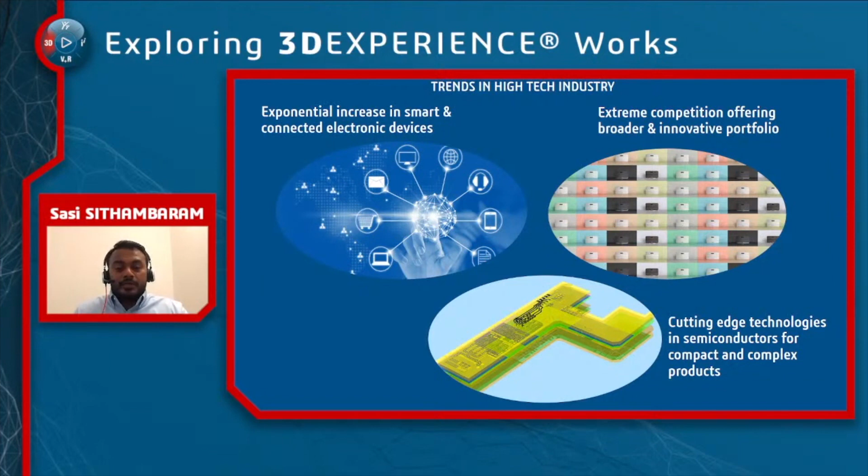Definitely. I mean, consumer products are really far behind right now. I know at least my friend, he ordered this new truck, and it has all the bells and whistles. So it requires a lot of these semiconductors for all the electronics to work, and they're over a year out, just in the supply chain of these semiconductors alone. So I mean, it definitely is a big industry trend right now. I have to agree with you there.

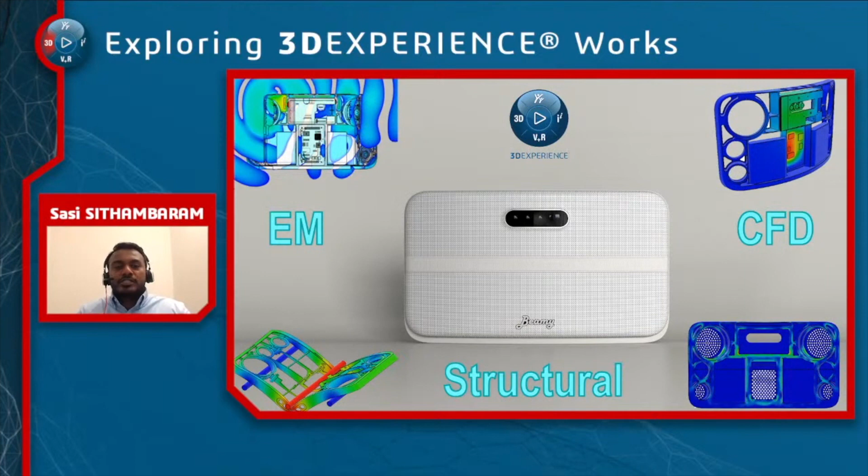So having to run the analysis and make design changes based on the analysis, how do you work in that collaborative environment is essentially going to be our conversation today. And the best part is that with the 3D Experience platform, you can actually run all of this analysis using the same data set on the same platform, right? So we can ensure that everybody is on the same data set at all times, whether it's revision changes or any design changes, they can rerun the same analysis over and over again, and all the different teams would be on the same page.

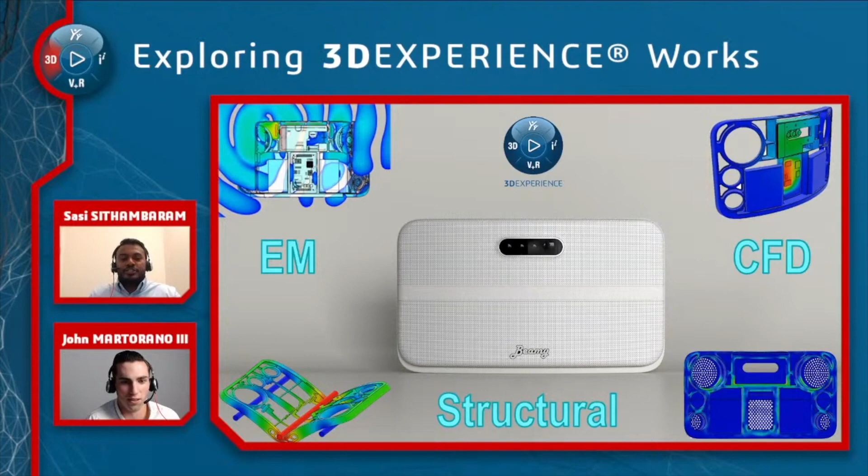So I'm going to actually start off the presentation with the CFD analysis. Now, why do you think that is, John? Well, that's a good question, but I could guess that maybe we don't want it to be too hot, right? Maybe it wouldn't work. That's a problem. And the EM stuff as well, right?

So let's take a look at our CFD solution on the platform. What we have is our fluid dynamics engineer role. All our products on the platform are called roles, because we believe that the product should meet your role, and we integrate all the features and tools to meet your requirement within that role, right? So the fluid dynamics engineer role offers a CAD and PLM embedded CFD for flow and thermal performance simulations. And this accelerates product innovation in a collaborative cloud environment.

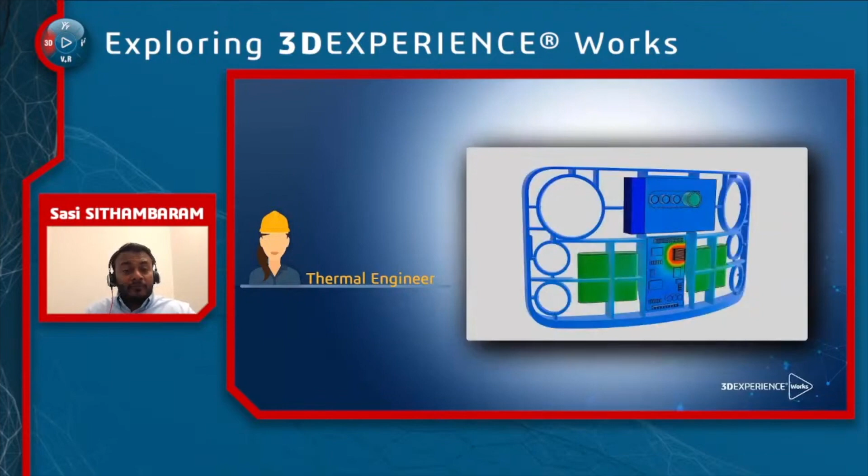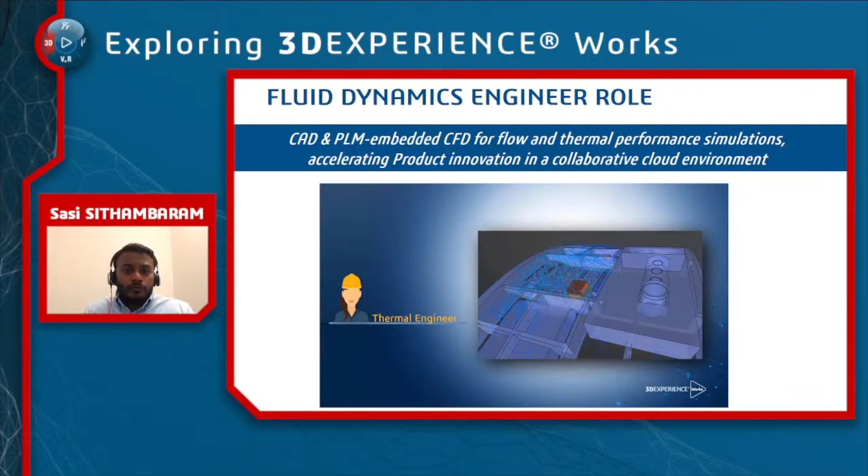And specifically for the Beamy, a thermal engineer would want to check for component temperature, right? So specifically the PCB board, the chips, the heat sink, and then also the airflow. We want to ensure that we have good airflow flowing into the model and then out of the model as well to keep that at a steady state temperature. Now, the fluid dynamics engineer role itself does so much more than just component or airflow type of analysis.

From a thermal perspective, we cover all different heat transfer - conduction, convection, and radiation, surface to surface and solar radiation. In terms of modeling, we do multiple reference frames, MRF.

We model fans, baffles, porous media. So if you think about it, with the fans, baffles, and porous media, the electronic component models become a really good fit for this role. In addition to that, we also have joule heating with this solution.

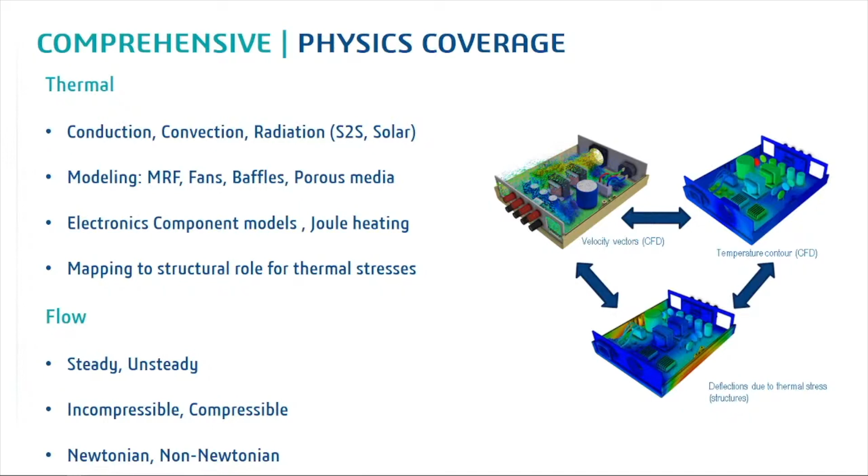And one other feature that we have, which is really great, is the ability to map the structural role for thermal stresses. And I cannot stress this enough, that with a product like this, we have to run thermal stresses because of the varying temperatures and varying materials and components that we have in this product.

Sometimes the thermal stress might be run by the thermal engineer, or sometimes by the structural engineer, or sometimes one engineer might be running the CFD, the structural analysis, and all of the analysis. But being that all of these solutions are on the 3D Experience platform, you can actually just reuse the same data that you got from your thermal analysis to run your thermal stress analysis.

In fact, we can even just run a thermal stress analysis directly in our structural analysis tool. So there's so many different variations, but what's important is being able to reuse the same data over and over again.

Great. So in terms of flow, we provide steady and unsteady flow. We can also handle incompressible and compressible flows, as well as Newtonian and non-Newtonian fluids and gases, and a lot of applications here, just by looking at compressible and incompressible flow.

So that has some aerospace applications. We are using the Beamy model today as an example. However, there are so many more - limitless options that we have to use this. Is that right, Sasi?

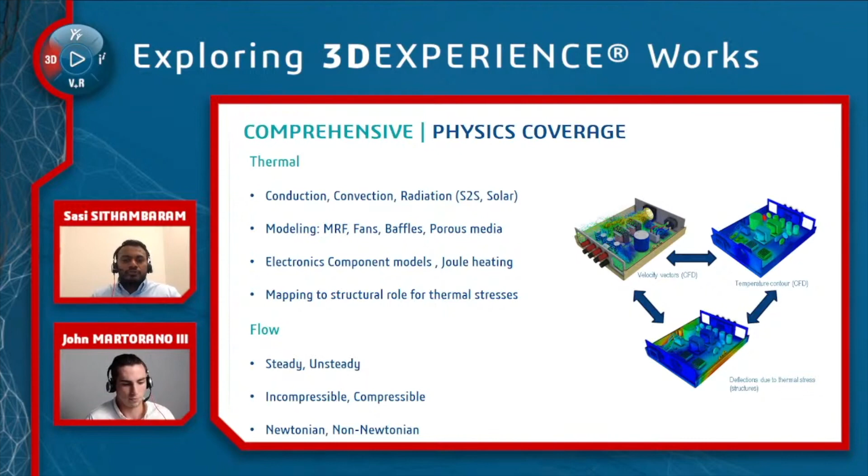Yeah, exactly. So this fluid dynamics engineer role can also be used in aerospace, automotive - a number of applications.

So for some of you who joined us in the last session where we covered all the Simulia tools, we actually showed some examples of using this role in an aerospace or automotive space. For those of you who didn't watch that session live, you can actually watch the recorded session on our SolidWorks YouTube page.

Great. So with that said, let's actually jump into the example, the Beamy model example. And the first thing I wanted to talk about is what the workflow looks like going from SolidWorks to the 3D Experience platform.

So I assume a lot of people on this presentation today are using SolidWorks to design their models, and SolidWorks really is where the idea becomes a reality.

So when we look at the first few steps, we have the model in SolidWorks. We save and transfer that model to the 3D Experience platform. We can launch the fluid scenario app, which is part of the fluid dynamics role, to set up the simulation directly within SolidWorks. That brings us to the platform where we can set up the analysis, execute the analysis, and then post-process the results.

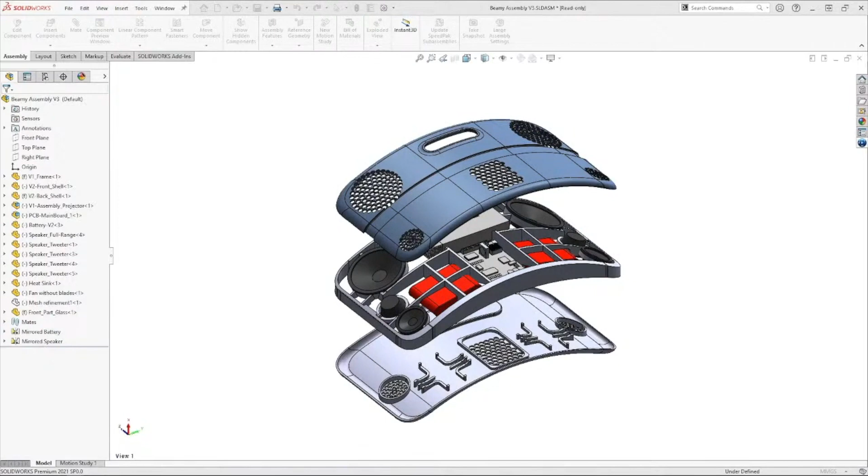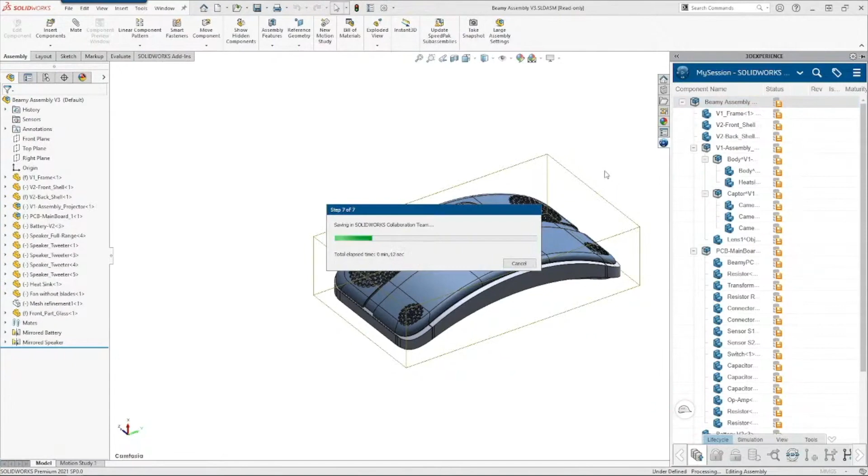And right within SolidWorks itself, we have our 3D Experience add-in, where we can actually go ahead and right-click that top level assembly and hit save. Now, when we hit save, it will automatically save the model to the platform. Not only does it save the model to the platform, it also creates a link between the model in SolidWorks and the model that we will essentially have on the platform to run the simulation.

Now, this is key. This is important because this enables us to make design changes and easily push those design changes to our existing simulation.

So we don't have to rerun or reset up simulations, even with design changes. We can run multiple versions of this model within the same analysis, so that's a huge time saver. We can just keep rerunning the simulation.

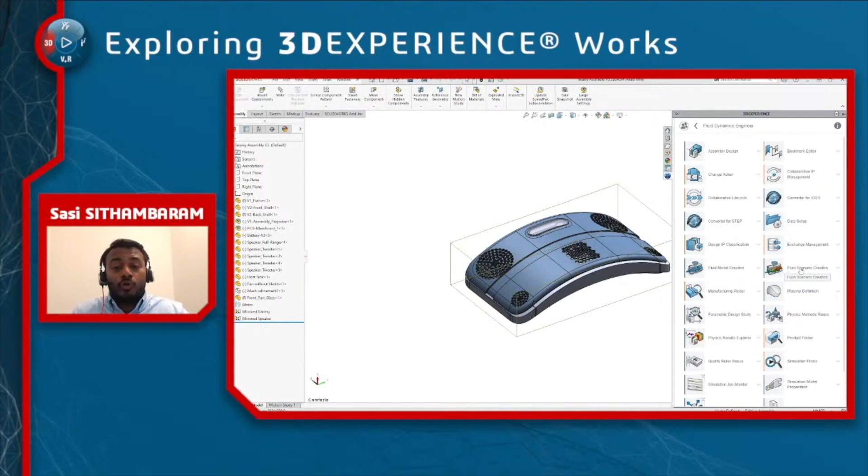Right within SolidWorks itself, we can actually launch the Fluid Scenario Creation app, which is part of the Fluid Dynamics Engineer role. This will bring up the 3D Experience interface, and then we can start setting up our simulation in the 3D Experience platform. So now we have the model here and we are in the platform. We can go ahead and start setting up the simulation.

So Sasi, is the setup of the model something that's easy to do? Is it intuitive? How's the setup process, what does that look like? That's a really good question, John. That question comes up all the time with simulation, right?

One thing that's super important to us when we were creating this simulation solution on the platform was to make it as intuitive as possible for the user. We wanted to make it a very straightforward tool so that anyone that uses it, especially SolidWorks users, will be able to navigate the interface in a straightforward manner. In addition to that, we also have some interactive tools to ensure that even beginners can easily start using this tool almost right away.

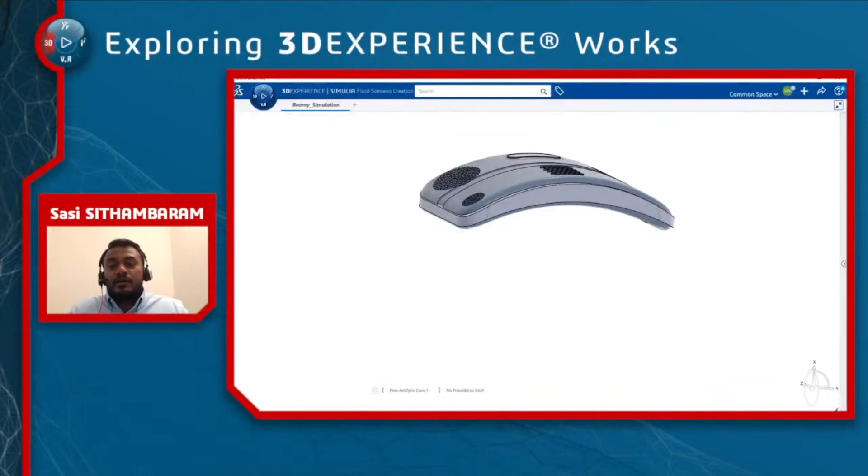So let's actually take a look at what that looks like. You can see here, we have our assistant tool. This assistant tool, which can be used by beginners and even advanced users, enables you to step through the basic properties and parameters needed for this simulation.

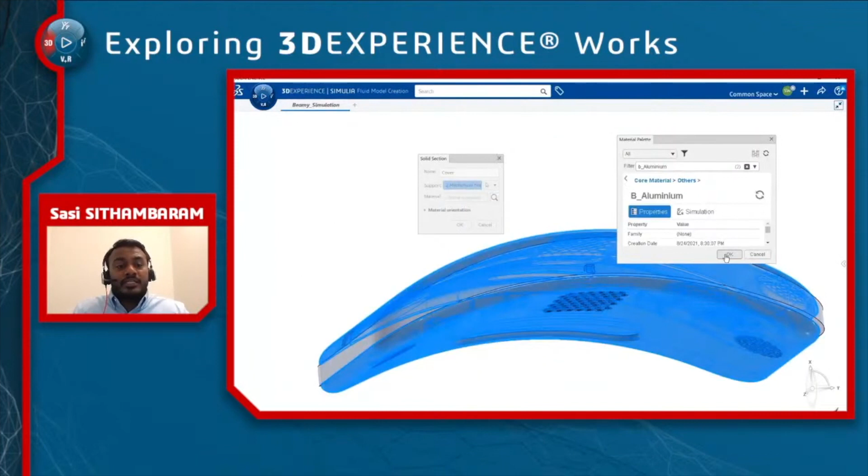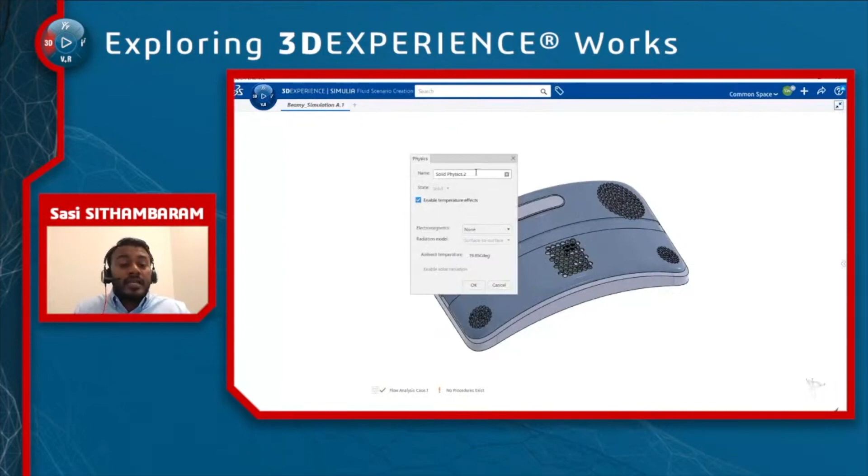So right now, for the first step, it's asking me to specify the materials for the model. The next thing is it says specify what type of analysis it is. Then the next step is it will say specify what are some of the initial conditions. Is it in room temperature, or is it at a much higher temperature to start with? Are there any initial flow conditions that we need to consider?

And as we step through this assistant tool, you can actually see there's a green check mark there. What this green check mark does, John, is it gives me the confidence that I'm actually setting up this analysis correctly. I don't have to memorize every step of the way, it's just kind of guiding me through the simulation.

A green check mark is, like I said, universal, good to go, so hard to mistake that for something else. And that red mark means stop, right? Take a look at it, you need to do something with that.

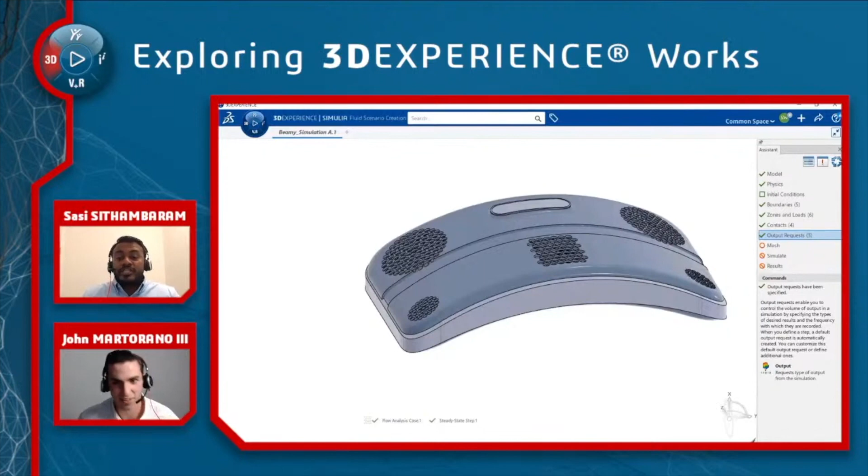So this can be for beginners who are just starting off, whether it's starting off with CFD analysis in general or starting off with this role, or even advanced users. Even for someone like me, I use this role all the time. I still use the assistant tool because it's a huge time saver and it enables me to step through all the tools right from this assistant panel rather than having to go look for all the icons.

Okay, so now that we've set up the materials, the physics conditions, the boundary conditions, the zone, the loads, the contacts, the next thing we need to do is mesh this model.

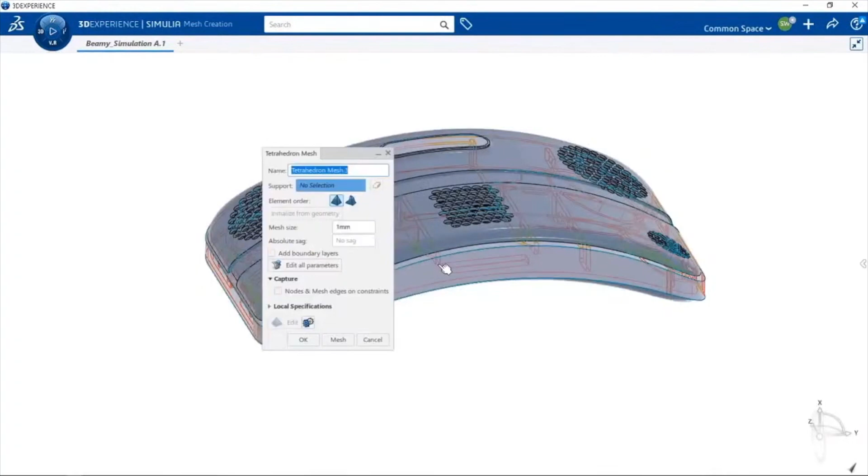Actually wanted to spend some time for some of our advanced users on this presentation today. We have quite a bit of advanced meshing tools provided on the platform, and we can even combine different types of meshing. We can combine our hex meshing and our tetrahedral meshing, and this is very important, especially with CFD analysis. We also provide tools to easily select and localize different mesh settings as well.

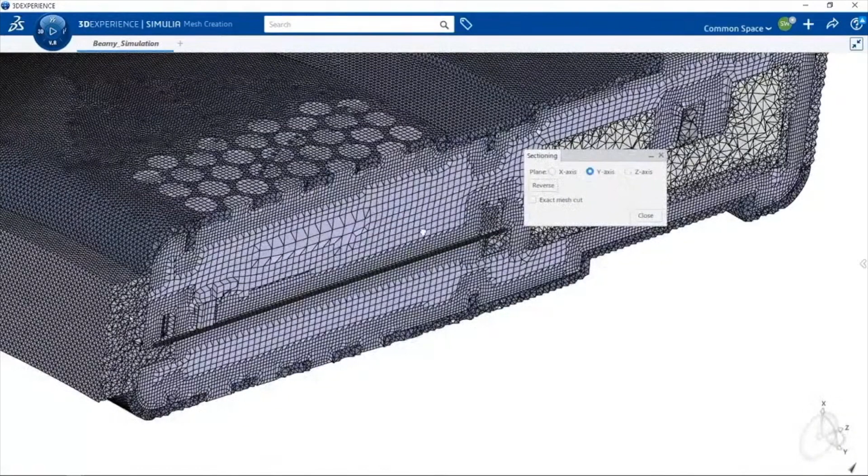What I mean by that is, take that heatsink, for example. This heatsink is a very critical component in our assembly here, in our simulation model here, because that heatsink sits on the main chip that powers this Beamy. Now I need to make sure that heatsink is at an acceptable temperature as well as the chip underneath it. So you can see that I actually have a very dense mesh around the heatsink and even in between the fins, so I'm going to get very good, accurate results around that heatsink and that chip, and that's really my goal for this simulation.

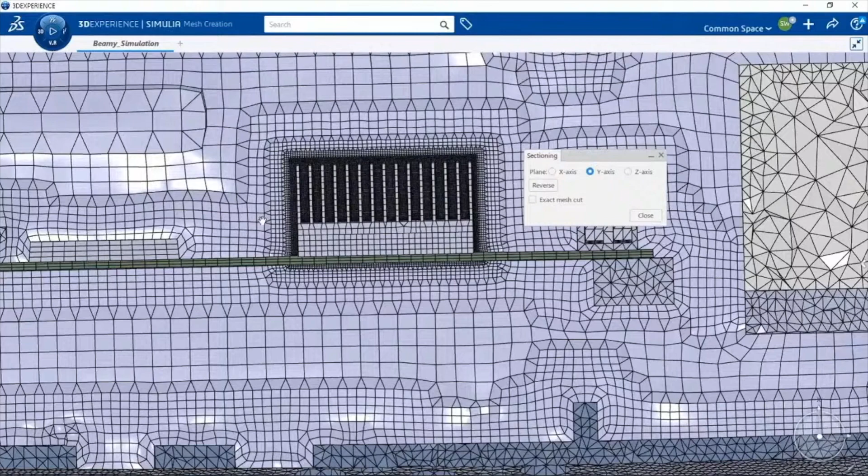Now, the void area or the dead space around within this enclosure, I probably need a decent mesh, but I don't need a super dense mesh like I do around the heatsink. So something that will just give me decent results, just making sure that the airflow is still within room temperature, it's not overheating. That's really all I need to know. So you can see that I have different mesh settings between the heatsink and the air around the heatsink.

Exactly, and resources really is the key word here, right? Because when it comes down to it, techniques like this are going to enable you to run your simulation much faster and get those results much quicker. So then you can make those engineering decisions quicker as well, as you cycle through your product development. So what comes after mesh?

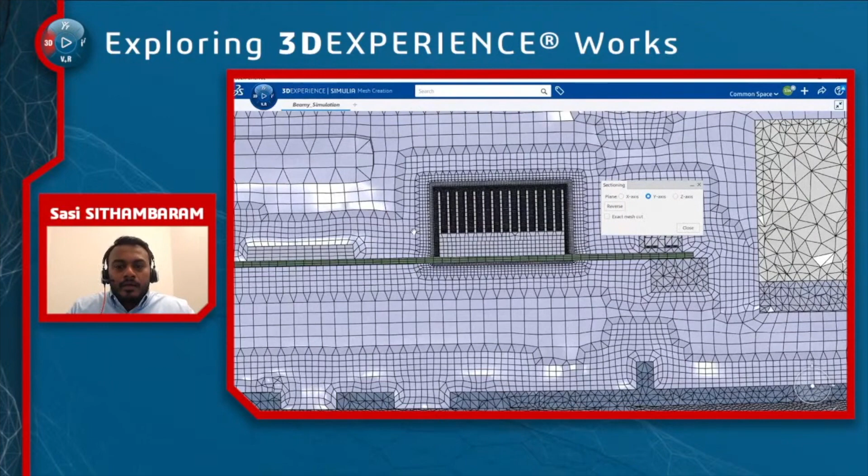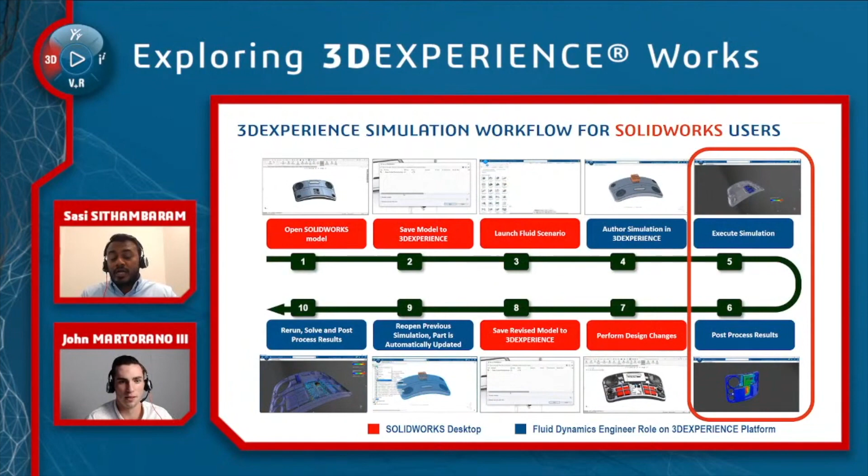Well, now we've completed the simulation setup. So now you have to execute the simulation, and then we can post process the results. We can take a look at the results and then decide how we can move forward from that point.

So to execute the simulation, we actually have a few different options for our users. We provide access to high power computing on the cloud for complex and large simulations, especially with the CFD analysis. Sometimes you might be running pretty heavy duty analysis, like we talked about earlier, aerospace and automotive. In cases like that, you might want to tap into some high performance computing, and we have access to that.

Having this role on the cloud enables us to tap into hundreds and hundreds of cores. So we provide that option, but it's not always necessary to have high performance computing. For maybe this analysis with this Beamy model, maybe I just need a few cores, whatever comes with my hardware. We also provide local embedded compute available up to 16 cores, as well as up to 16 cores on the cloud. That's a lot, right? I mean, I think my computer has something along the lines of like 7.

So that's a decent number. Yeah, so most engineering computers today, I would say, ranges between 4 to 8 cores. And you could run pretty good analysis within 4 to 8 cores. And what's nice about this role, and this is quite unheard of, is that we provide 16 cores without any additional charges. So for some of our users that have already invested in hardware that perhaps has like 12, 14, 16 cores, they can use all of those cores without any additional charges. Now, let's say for a user that has a machine that only has 4 cores, they can run up to 16 cores on the cloud without any additional charge as well. So many different options here to ensure that you get your work done at an acceptable time.

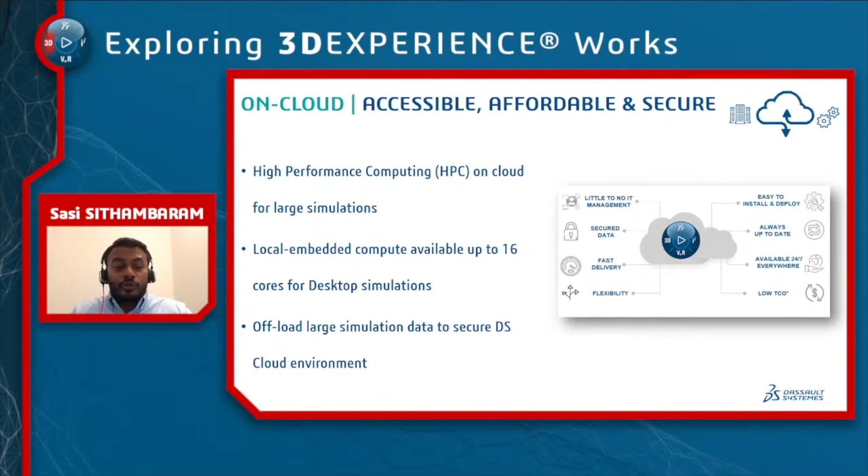And then, of course, last but not least, we talk about cloud. I think the question about how secure it is always comes up. I always like to put this out there, John. DS has made a commitment to secure data. We have the highest level of data security when it comes to data on the cloud. So there really shouldn't be any concerns in terms of data security on the cloud. I'm sure people would be very happy to hear that.

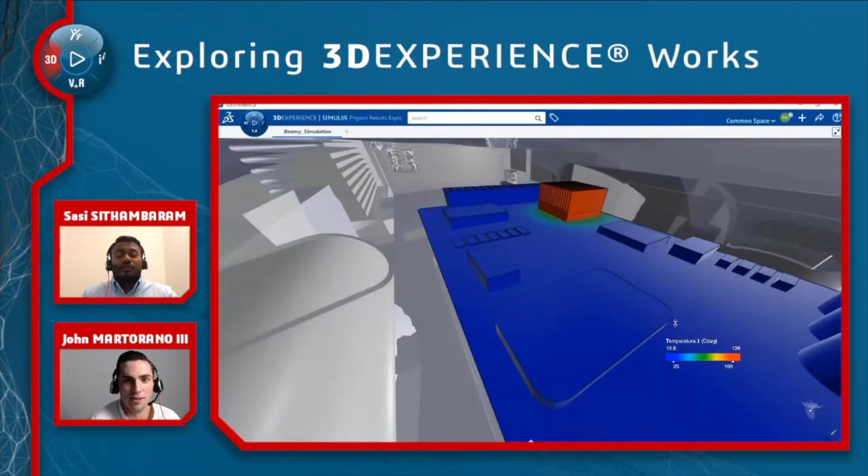Absolutely, absolutely. All right, so let's take a look at the results that we have here. You can actually see this result looks amazing. This is the type of results that you will get running your simulation on the fluid dynamics engineer role, and you can also process your results on the cloud as well. So let's say if you want to get this very very swanky graphical results, you can, and you can use those cloud computes as well.

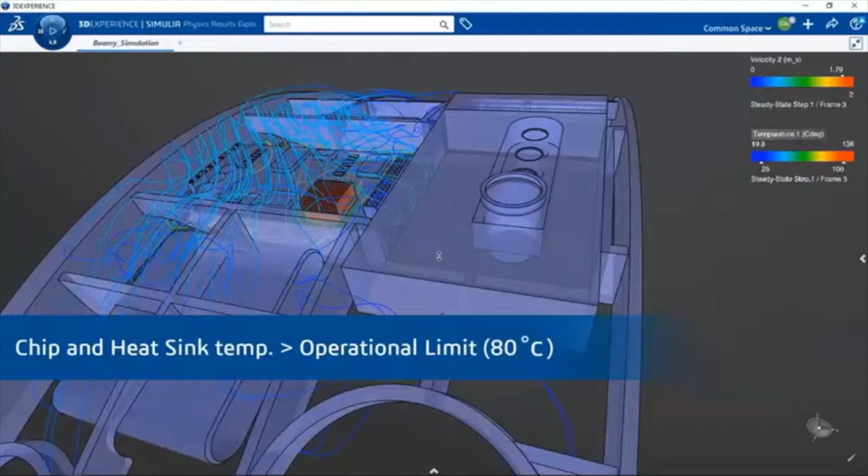So taking a look at the results here, we can actually dive deep into the results. We can even output some very very accurate graphs, and you can actually see how much time it took for the chip and heatsink to reach steady state. And right now we are looking at 130 Celsius for the chip, and that to me is kind of high. So we really wanted to shoot for under 80 Celsius, so 130 is kind of high.

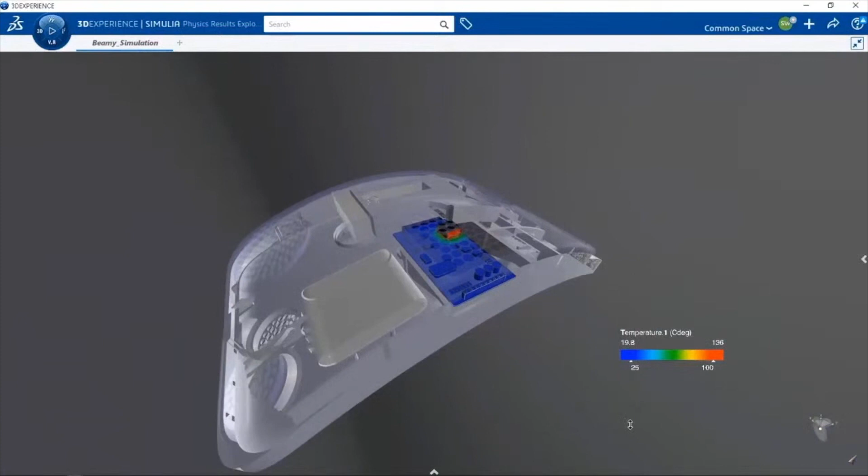And when we think about products like this, these consumer products, compact electronic products, there's usually quite a big factor of safety there. So it could run maybe at 120 Celsius without any issues.

But on a hot summer day, I want to be able to have my projector in the desert and it still work for me. Yeah, exactly, right. If you're going to be in a room that has a lot of computers and the room temperature is high, let's say the AC is broken and the temperature spikes in the room,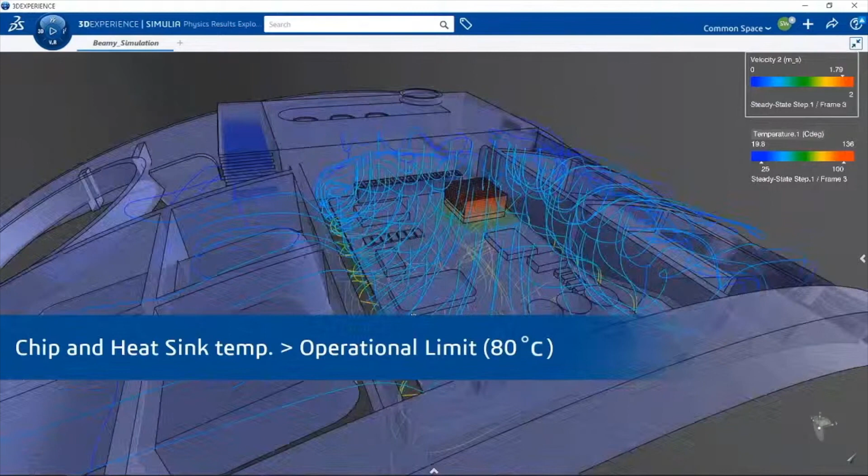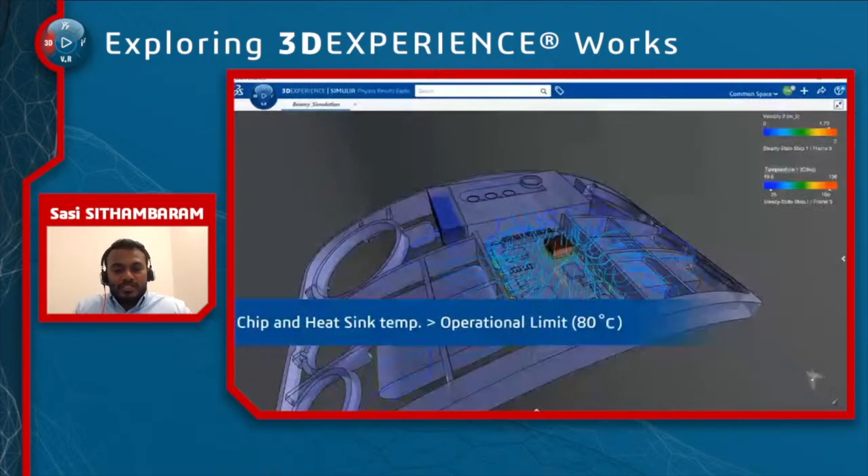the electronic component should be able to withstand that sudden spike in temperature. But can it sustain running at a high temperature over multiple hours? Maybe not. So we want to make sure that we are running this system at an acceptable temperature. In this case, we want to make sure that it's under 80 Celsius. So this is what we talk about in terms of running that iterative process. Now we have the results, and we can make real engineering decisions based on those results.

Hey Sasi, before we jump into making design changes, I was just wondering, how long did it actually take for you to run that simulation? That mesh looked like it got pretty bulky, so I'm curious how long that might have taken in the cloud. Yeah, that's a really good question, Gian. For this model, we actually did a few different benchmarks. Running it on my computer, local hardware, I think I have an 8-core machine, it took about 2 hours to run, but this is a very in-depth analysis.

But guess what? When I ran it with 16 cores on the cloud, it dropped to about 24 minutes. That's insane. Wow. And I haven't even tapped into the high performance computing. With high performance computing, I think we have about 280 cores on the cloud. That would have brought that number even lower. So under an hour, I can run this, solve it, get my results, and move forward with my engineering work. Great.

Awesome. One more question about the mesh. I'm wondering how those brick elements compare to something like SolidWorks Flow Simulation. Is it comparable to the same kind of meshing, or could you speak to that a little bit? Yeah, Flow Simulation in SolidWorks is a really good tool, and what we've done with our Fluid Dynamics Engineer role is ensure that it's at the same level as our Flow Simulation tool in SolidWorks.

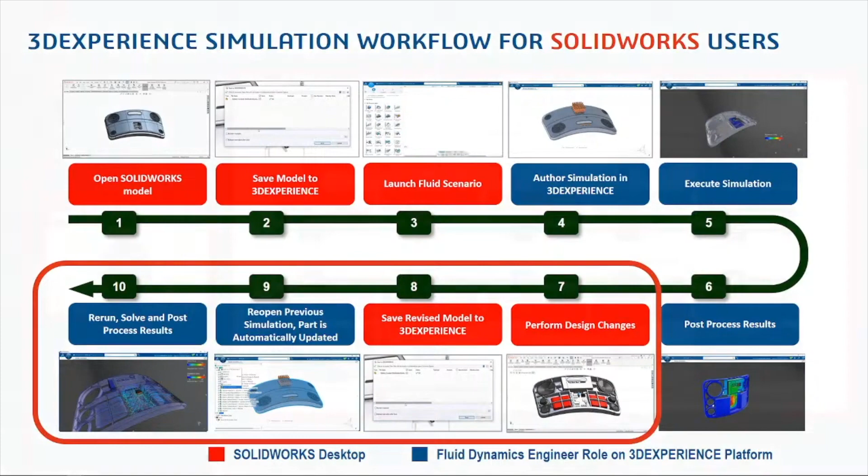So what we can do here is maybe introduce something for a cooling system. With electronic products becoming more and more compact, in recent years there has actually been more development with compact fans, believe it or not. Today you can buy fans that are tiny and fit into your compact electronic products. How small are we talking? It doesn't really do much in terms of cooling it down. What it does is divert the cool air in the right direction. So it really does a good job making sure the air coming through our ventilation is pushed in the right direction. So let's take a look at doing that for this Beamy model.

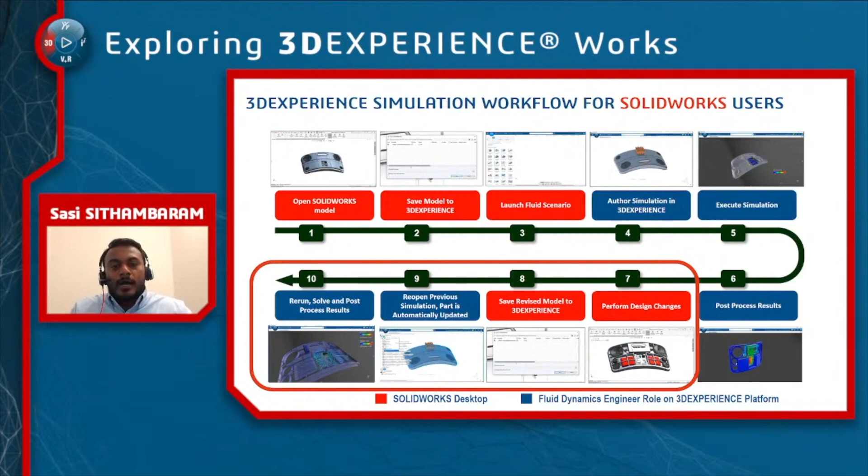So here, what we're going to do is we're going to make that design change. So you can see here we have introduced that tiny little fan, that cute little fan there. And what we'll do is we will actually save the model to the platform as a new revision, right? So if you take a look here, we have 5 revisions. So this Beamy model has gone through 5 revisions, right?

So maybe the first few were design changes, right? And iteration E1 is, you're introducing a new component, right? So when we introduce a new component like this, maybe the design engineer made this change and has pushed this new revision to the platform, all of the teams that are working on this Beamy model on the platform will automatically see this new revision, right?

So let's say the structural engineer, the electrical engineer, and the thermal engineer, they're all running their simulations. They are working in that 3DSwym community, right? So that's another tool that we have on the platform where everybody can collaborate and post images and post their CAD models and discuss things like new iteration. Let's say the design engineer goes on there and says, hey, new revision E1, run all your ongoing simulations on E1. Everybody will see it.

They can actually just go right onto the platform and they can rerun the analysis that they had set up for revision D1 with revision E1. So they don't even have to reset up the analysis, right? So that is a huge, huge time saver, right? So, just being able to change the model, you have to remesh it because you've introduced a new product, and then just hit run and you get your new results.

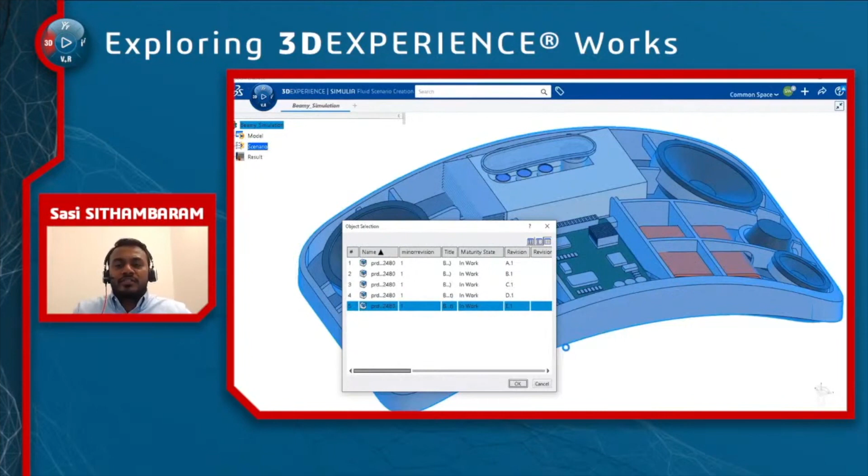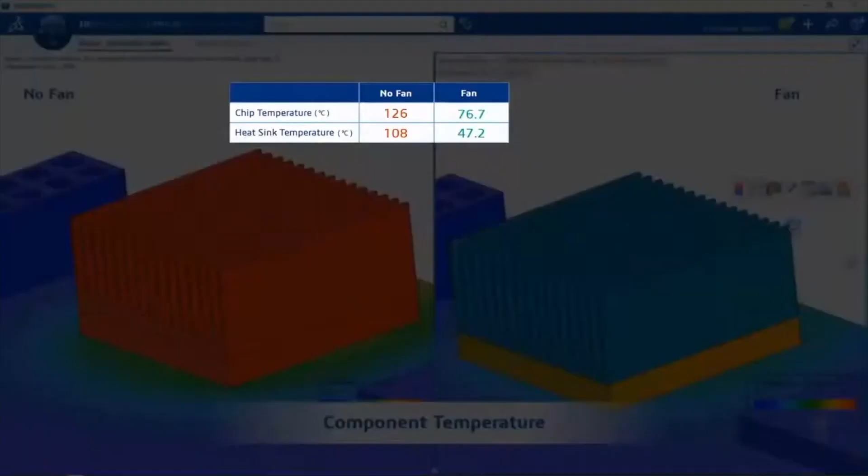So with that said, let's actually take a look at how introducing this fan has changed the results. So taking a look at the fan, the chip temperature, we went from 126 down to 76.7. So that's under 80 Celsius, where we want to be. And I think the heat sink went from 108 to about 47 Celsius. So that's about room temperature, slightly higher than room temperature, which is exactly where we want to be for the heat sink. Now, this actually makes a lot of sense, right?

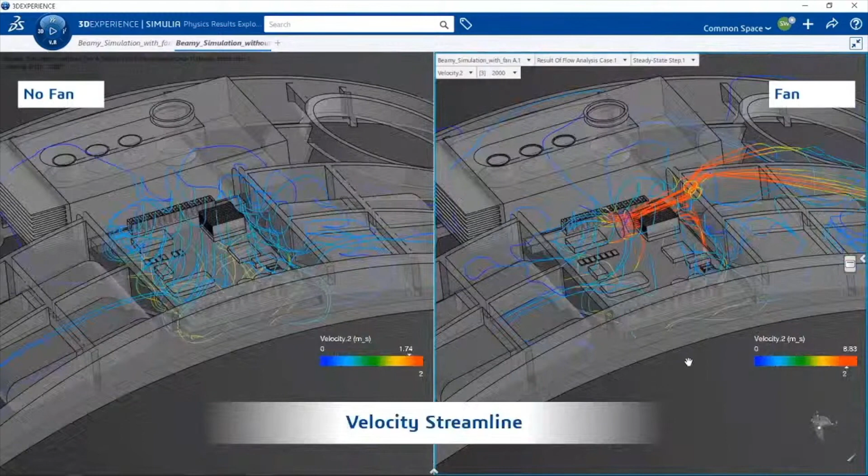So essentially what we've done here is that little fan has diverted the room temperature air to blow over the heat sink, right? So that cold air is capturing all the heat, and it's pulling the hot air out, right? So there's an assumption a lot of people make, when they hear their laptop fans go off and they put their hand on the ventilation and there's hot air blowing out, that their system is overheating. Actually, it's not. It's doing exactly what it's supposed to do. It's pushing the hot air out of your system. So whatever cooling system that's built into your desktop or your laptop is working great.

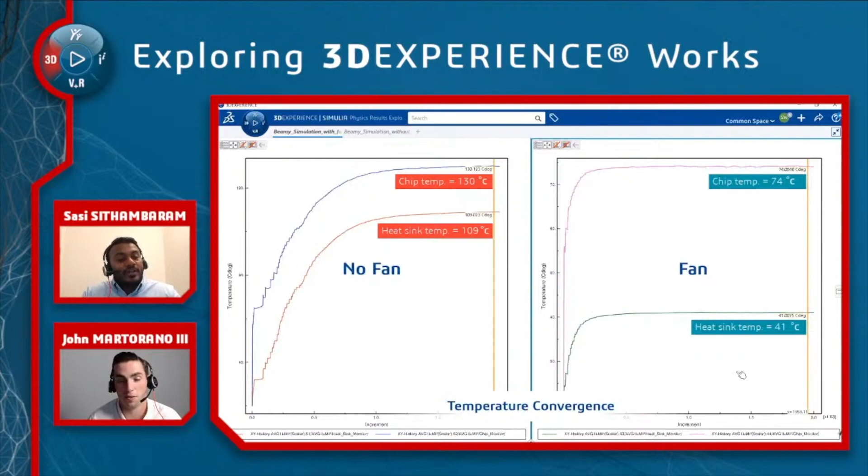If you touch the laptop and it's hot, now that's a different question, right? So maybe you need a better cooling system. Maybe you need to add your own fan or something like that. But in this case, I think the results look good here. I mean, the heat sink's at 41, the chip's at 74. We hit our requirements, meaning that technology-wise, this works. So now I can actually move to the next stage, which is: is this product going to be strong enough, right?

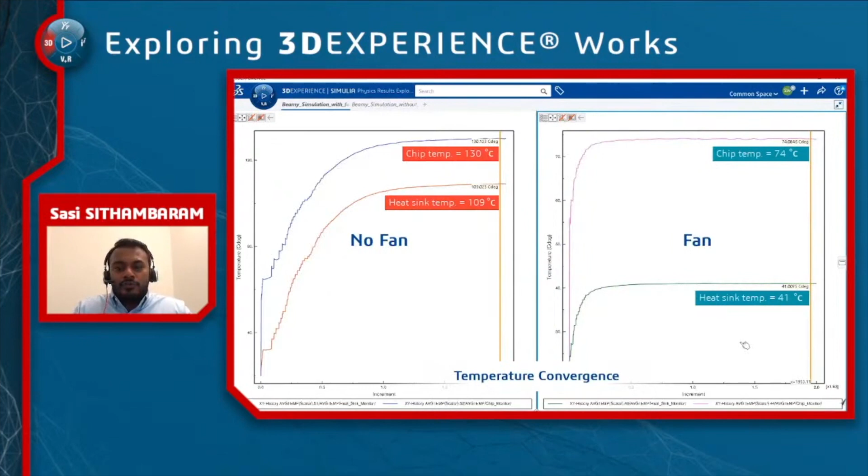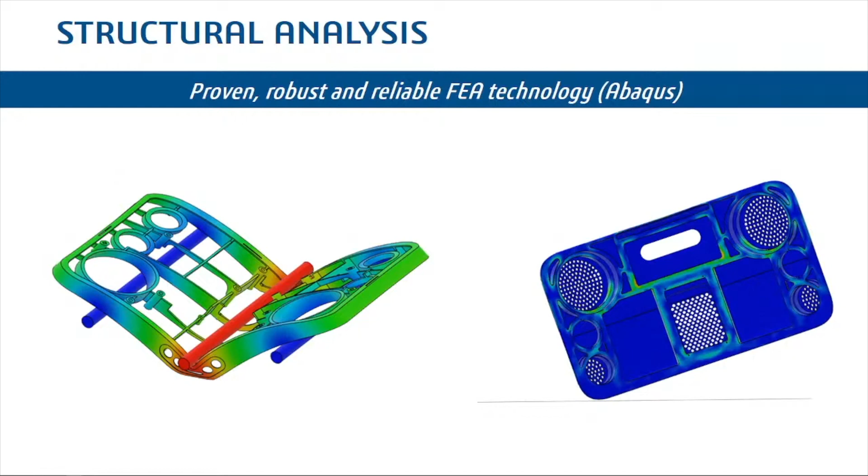So we're going to think about structurally how this Beamy model is going to perform. So from a structural analysis perspective on the platform, we have this proven, robust, and reliable FEA technology that's based on the Abaqus simulation analysis software. Some of you on this presentation are familiar with this and some of you might not be, well, Abaqus has been around for almost 30 years. It's really the product that kicked off our Simulia brand in Dassault Systèmes. It's one of the best, if not the best, structural analysis software on the market.

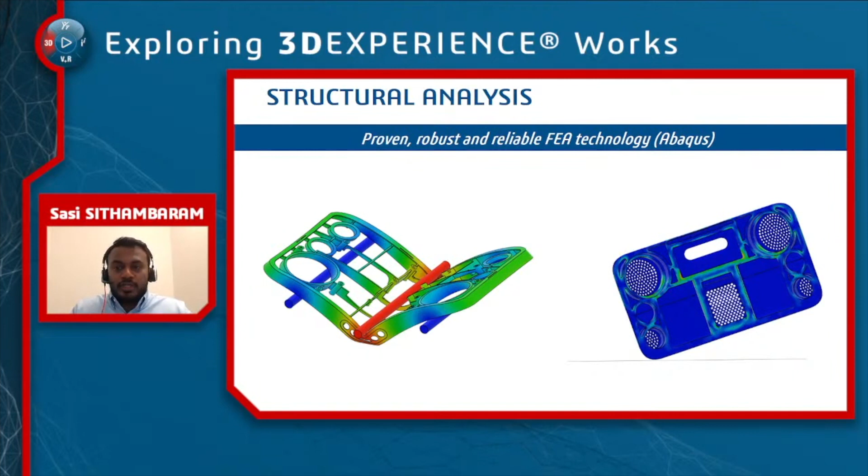And what we've done at Dassault Systèmes is we've taken that Abaqus solver and we've integrated it into the platform, right? So now SolidWorks users can actually use this type of technology. So John, to your question earlier, that flow simulation versus fluid dynamics engineer role, with the fluid dynamics engineer role, the users can also take advantage of the Abaqus solver on the platform, right? So this is platform specific, an advantage of using the platform. So when we look at what we have to offer in terms of structural analysis on the platform, we actually have multiple roles, versus the fluid dynamics or CFD analysis, where we only had one role, right?

And like I said, our roles typically match your role in an engineering team. So the first role we have is our structural designer. This enables you to run linear static analysis, frequency, buckling, and thermal. These are very typical analyses that you run in the early stage design phase. So if you're still trying to decide on certain design features, you can run these analyses and drive your design changes based on simulation results.

The next role we have is our structural engineer. It's a step up from our structural designer with the addition of our linear dynamics functionality, so if you want to run some vibration analysis, you can do that with our structural engineer role. The next role we have is our durability and performance engineer role, which enables running nonlinear static analysis as well as fatigue analysis, in addition to all the other features that come with the structural designer and structural engineer roles. So if you're dealing with any nonlinear materials or nonlinear conditions for your simulation, this will be a really good role to use.

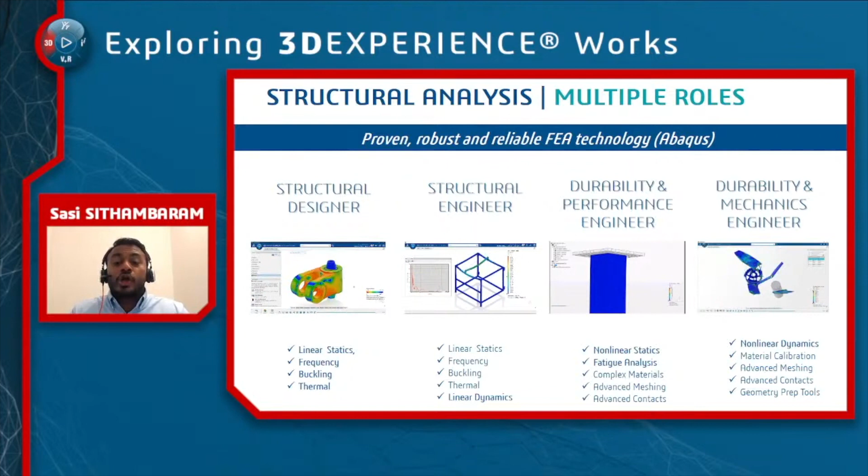It also comes with the ability to integrate complex materials, advanced meshing, as well as advanced contacts. When we think about contact conditions, that really is what makes Abaqus as powerful as it is, because of how well it handles contacts between different components. And the last role that we have here is our top of the line role, our durability and mechanics engineer role, which enables nonlinear dynamics. So when we have components like this blade on the screen that are moving, and we have this damage model, this nonlinear dynamics solver is a really good fit.

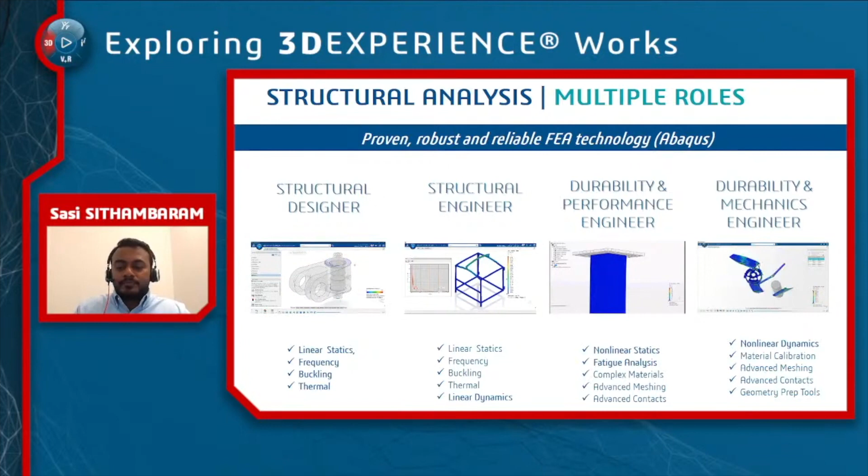So for this Beamy model, the first structural analysis that you're going to run is a 3-point bending test. A 3-point bending test is pretty important for compact products like this. It really is to test whether it's normal wear and tear or if it's being abused. So think about your cell phone. You buy it, it comes with a 1-year warranty, 365 days. At day 364, I go over my knee and just bend it, break it. Yeah, I want a new one. Is that gonna work? Try to break it, maybe I can get a new phone out of it on day 364.

And well, guess what? The manufacturers have tests for it, and they can, without a doubt, tell you that if you're able to bend your cell phone like that, you've essentially voided the warranty, because you've abused the product. That's not normal wear and tear. Normal wear and tear is, let's say, if I put my cell phone in my back pocket and I sat down and it bent a little bit. It usually should still work in that case. It might not look sleek anymore, but it should still work. So that's how, from a manufacturer perspective, you can guarantee that these products are not going to become a warranty nightmare.

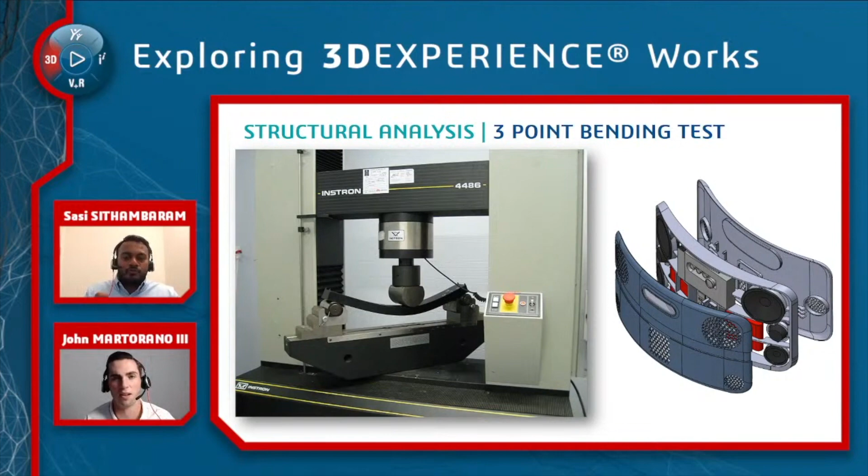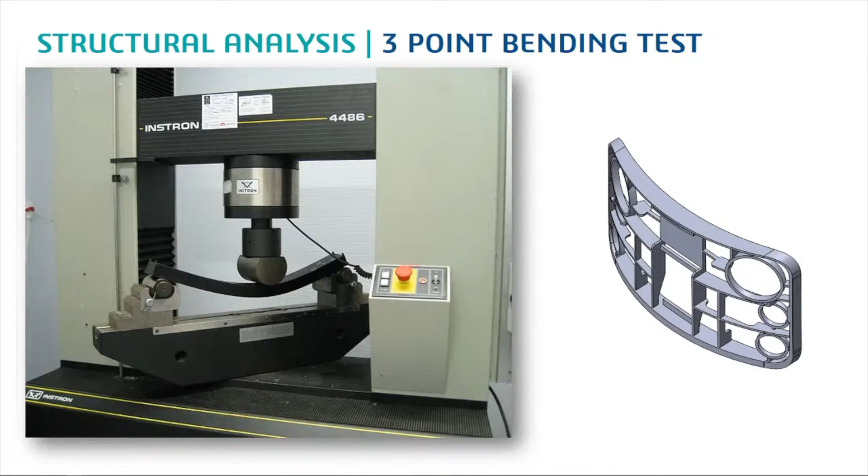So for this Beamy model, I'm actually just going to run the 3-point bending test on the main chassis itself. This has to be the strongest component; it essentially holds the strength integrity of this entire product. So I'm going to test it on this. Now for this test, I'm actually going to do something different. In the original Beamy, this chassis was aluminum. If you look at the design, pricey, a design like this would probably have to be CNC machined, which can be expensive and time consuming.

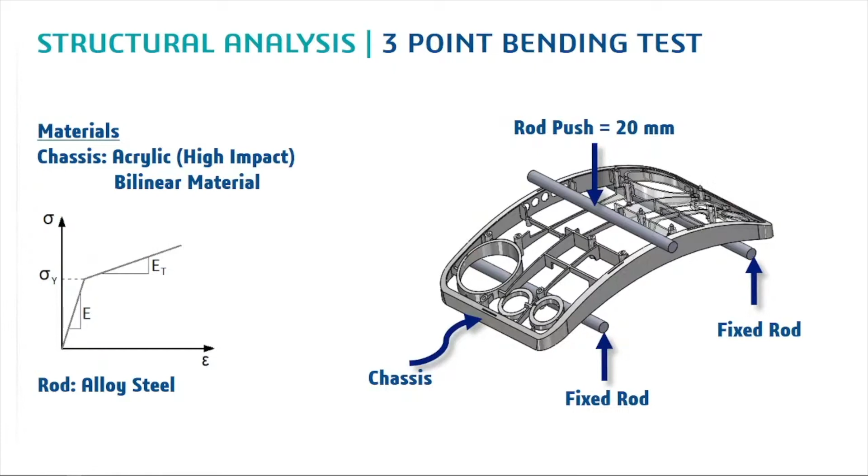Now, let's say this Beamy becomes a hit and I want to mass produce it and bring the cost down, I would probably need to be able to injection mold this chassis. So I'm actually going to try a plastic material here, an acrylic material, which is a bilinear material, so it's not a linear material. So I'm going to use our structural performance engineer role to run this analysis. You can see I have two fixed rods, and a metal rod that's pushing down the middle by 20 millimeters to see if it will be able to withstand that kind of wear and tear.

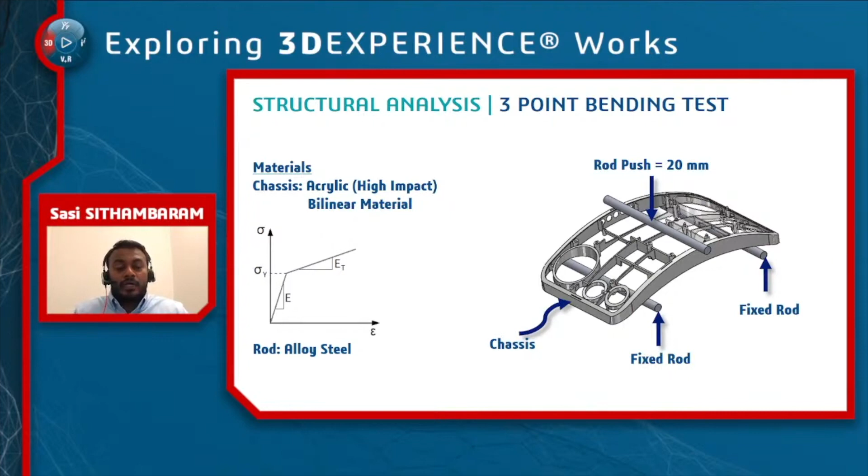Hey Sasi, I know we're focusing on the structure. I'm just wondering, is it possible, if we wanted to see if the inner components would pop off of this chassis, to take a look at how those would behave? Is that something we could do here? Absolutely, absolutely.

So that would be, I would say, a later stage analysis where what we could do is we can put all of these components together, and yes, we can do a 3-point bending test, we can do a drop test, and we can even simulate fastening. A product like this, we typically don't have screws. It's all being fastened together, right? That's why typically when you drop it, we want to make sure that our fasteners are modeled correctly and modeled in the right place. So yeah, this solution really provides an end-to-end simulation solution.

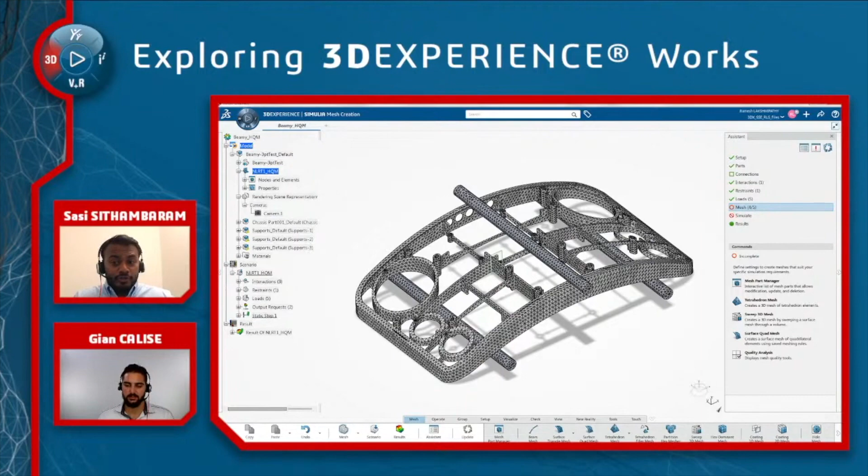All right, so taking a look at this structural analysis, look at the interface. This is the exact same interface that we had for our CFD analysis, right? The simulation setup is on the left, the icons are at the bottom, and the same assistant tool is on the right of the screen. So this is, to me, a huge advantage.

So let's say I was in a leaner engineering team and I was running the CFD analysis and the structural analysis. Guess what? I don't have to go learn an entirely new product or an entirely new interface or where the icons are. So one thing that was important to us is the consistency of the platform: having all these different tools that have different usage, but having that same interface and being able to use that same data set over and over again.

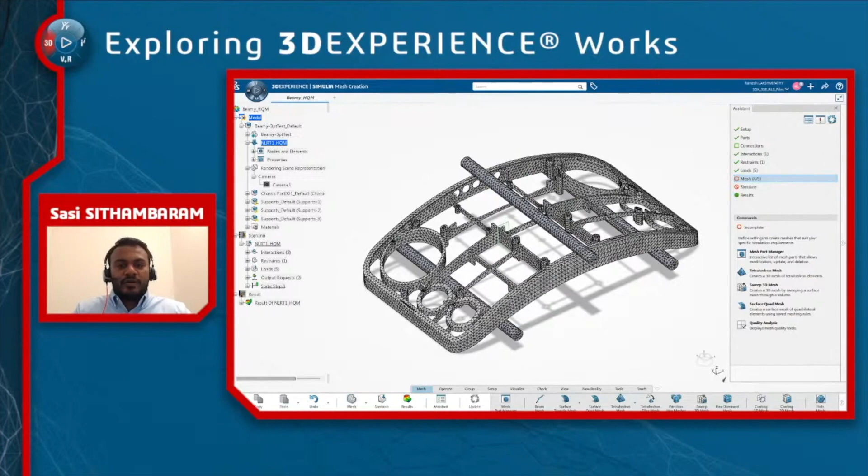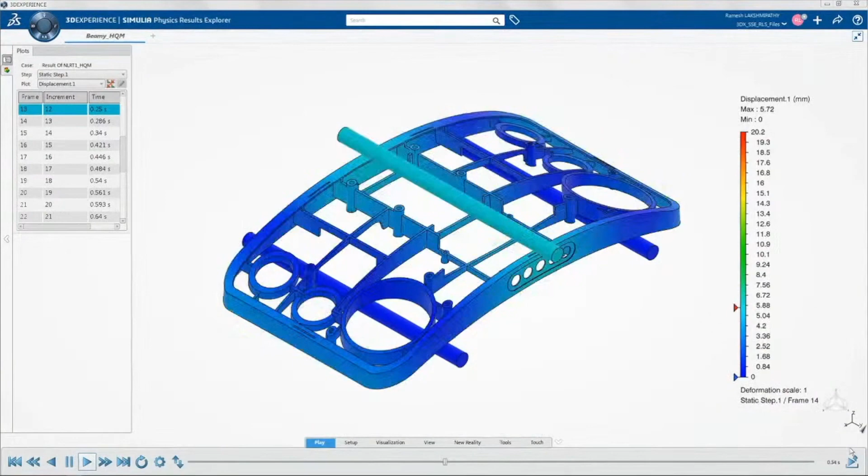So we have the history tree to the left of the screen, all our icons at the bottom, and the assistant tool to the right of the screen. Now, taking a look at the results, you can see that the material actually snaps back into place. So this actually has some give, because it's bilinear. Let's say the component is in your backpack and somehow it's bent a little bit, like 20 millimeters, it will just go back to its original shape. So there's no permanent deformation for this product.

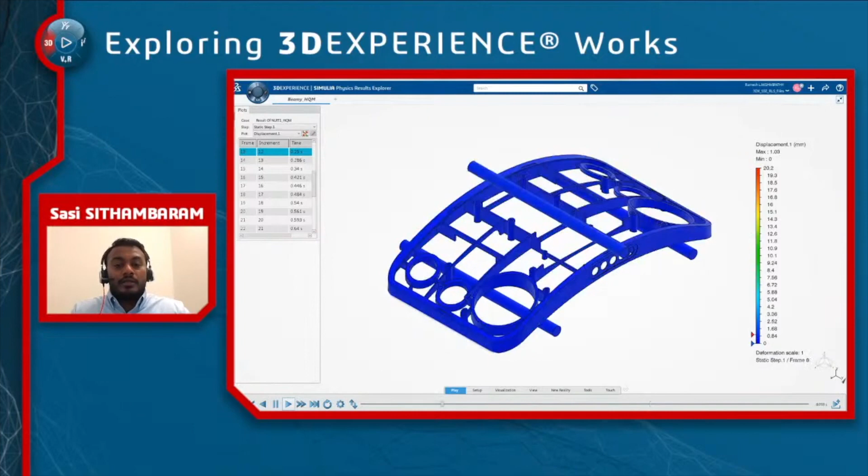One thing I wanted to bring up here, John and Gian, is that we actually tried to run this in SOLIDWORKS Simulation, and we were unable to converge the result due to its non-linearity. SOLIDWORKS Simulation does have a non-linear solver, and it has its usage, but in cases like this, where we're using a bilinear material and a snapback, we were not able to converge the result. So for our users today who are using SOLIDWORKS Simulation and looking for more capability, you can step right into that structural performance engineer role today and start reusing some of the data that you already have in SOLIDWORKS Simulation.

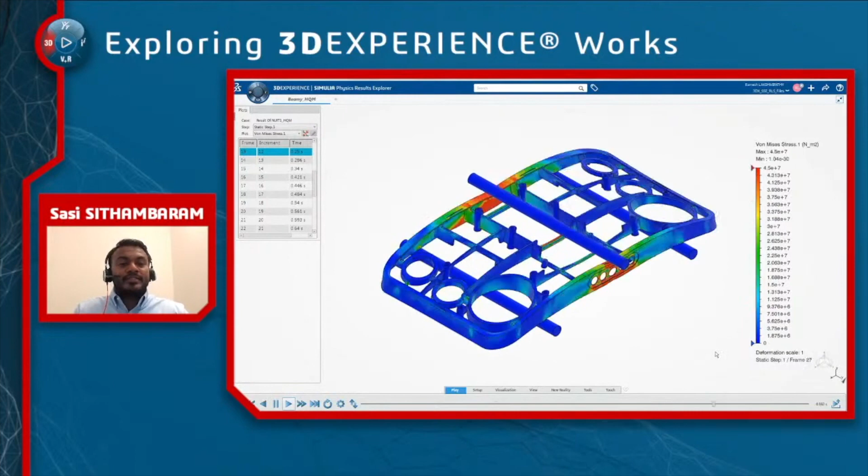So taking a look at the stress results, the stress is also within the acceptable range. So it looks like, structurally, with the 3-point bending test, as long as the user doesn't abuse the product, we are in good shape. So with normal wear and tear, we should be in good shape in terms of warranty.

Now, another very critical test that has to be run for consumer products is the drop test. This is not optional. This is a test that you have to run. Going back to that term I used earlier, it's not a question about if it's going to drop, it's a question about when it's going to drop. If the consumer is holding it in their hand, they're going to drop it at some point. I know I've dropped my mouse, my phone, everything that I've held in my hand. So let's take a look at what that result looks like.

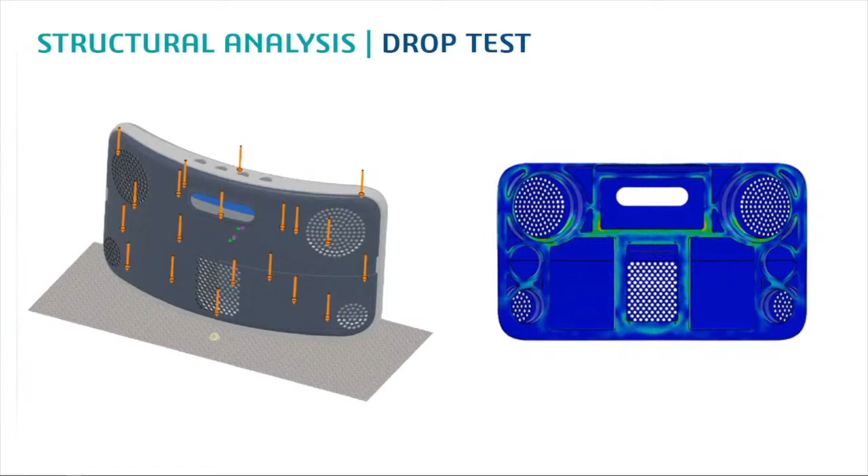What I'm showing here is actually an early stage design of that chassis, where it's a little bit bulkier. The reason why I wanted to show this is because we actually got really good results. The stress was very low, the deformation was very low, and that means we've kind of over-designed this component a little bit. So we were able to remove material and make this product much lighter.

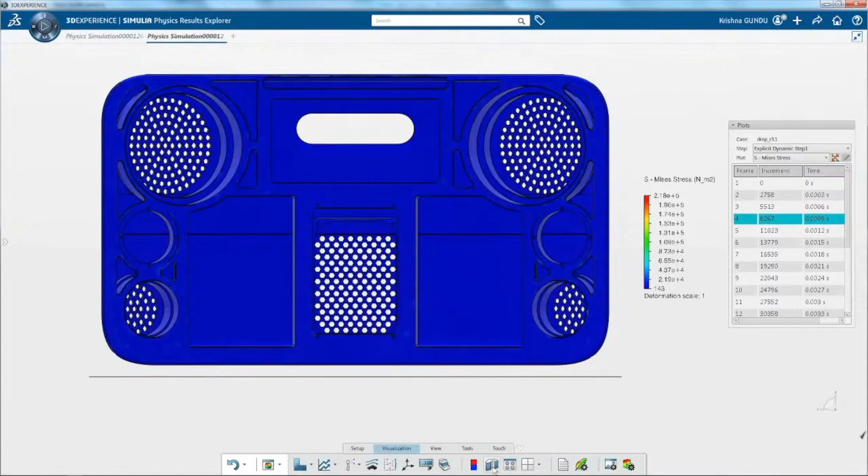Now, another big advantage of running a simulation analysis for a product like this is being able to view your results in very close proximity, really diving into your results. In this case, we created a section view to see what the stress is across the thickness. A product like this will have very thin walls, so we want to make sure that it can withstand any direct force onto the body. That's not something you can do easily with regular prototyping, by actually making the prototype. It's not easy to make a section view without wrecking it and actually see its actual deformation.

Yeah, actually it's almost impossible, right? So how do you cut through a product to see? Because if you change the product in any means, then you change the strength integrity of the product, right? So this is where simulation plays a really big role, just being able to really dive into your results. So one thing we actually were able to capture here was high stress and deformation around that speaker hole.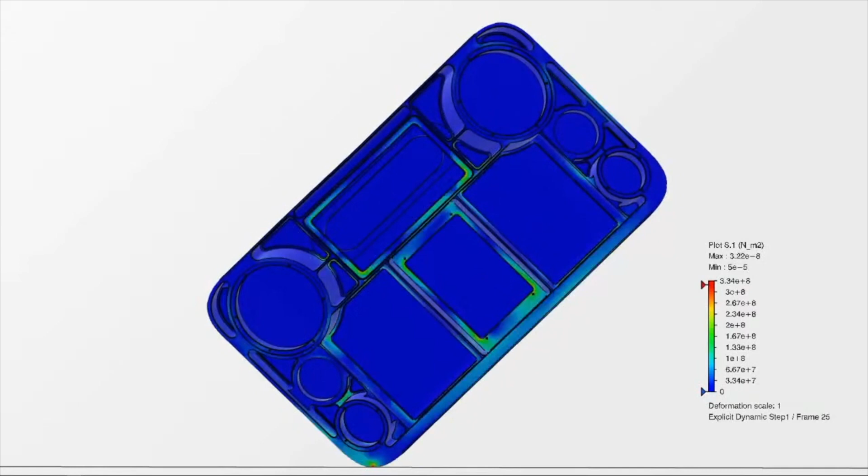So let's say you wanted to figure out how this component is going to rotate in air. Once you've set that gravity and that center of mass, with all your components in different locations with different weight distribution, you can very easily find the center of mass even in SolidWorks. But how is that product going to start rotating in air and where is it going to land as you drop it from, let's say, 3 feet, 6 feet, 9 feet, 12 feet? You can do that in this analysis, right? So it'll give you a full perspective of how the consumer is going to be using it.

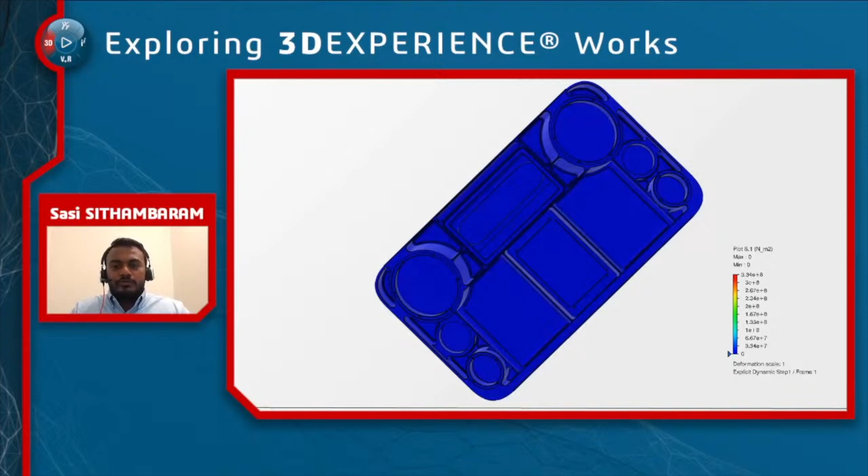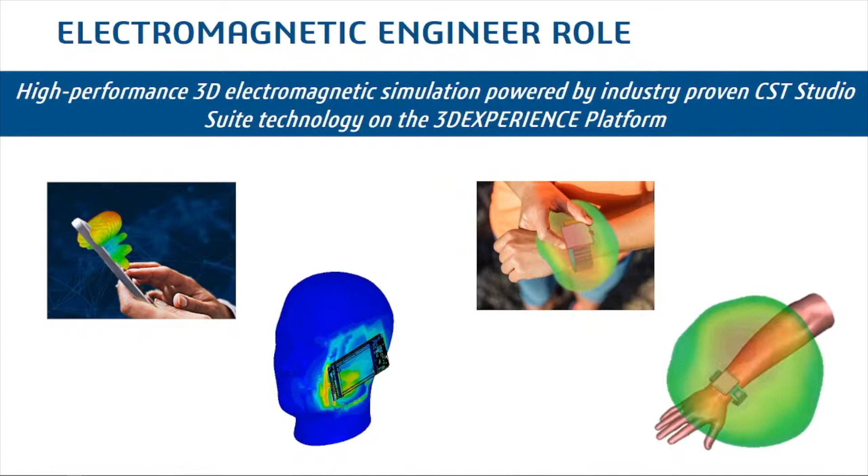All right, so that actually wraps up our structural analysis for the BME model. So the last thing I'll touch on in terms of simulation is our electromagnetic analysis, right? This is a new addition to our platform, and it is our Electromagnetics Engineer role. This is a high-performance 3D electromagnetic simulation powered by the industry-proven CST Studio Suite. For any of you out there running EMAG simulations, I'm sure you've heard of CST. It's been around for many years, and it's used by a lot of industry-leading electronics companies. And our technology on the platform is 100% CST Studio Suite.

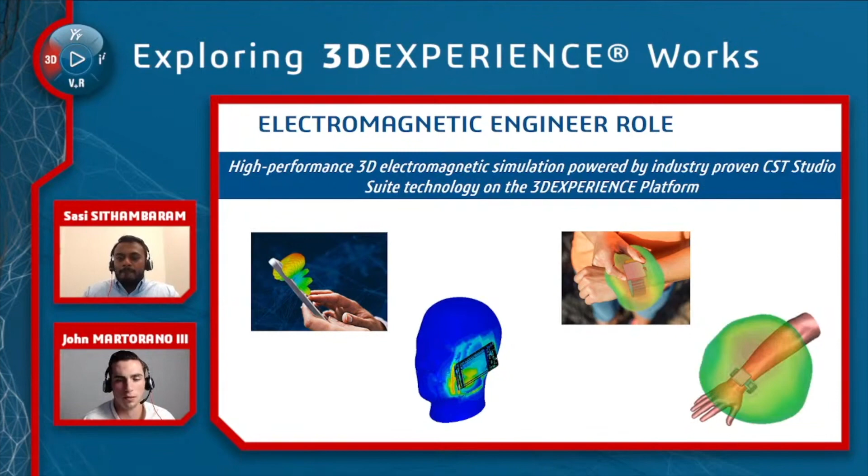So the Electromagnetics Engineer role enables high frequency and low frequency electromagnetic simulation all within the same simulation role. And this is a huge advantage, right? If you look out in the simulation market, a lot of times these are divvied up into different products. We provide high frequency and low frequency as a single solution. We can use this solution to optimize antenna and microwave devices, so the antenna optimization is going to be big for the BME. We can prevent and minimize electromagnetic interference, again a big one for the BME, and electromagnetic compatibility issues as well.

And with the CST Studio Suite solution, we can also run coupled simulations, coupling it with heat transfer at a system level, hybrid. We can even integrate multiphysics, where we can combine electromagnetics and circuit co-simulations as well. So at a high level, the reason why we run electromagnetic simulation is to make sure this BME model is going to play nicely with other devices. We need to know what type of frequencies it's going to emit, and make sure it doesn't interfere with anything or cause any harm to anybody.

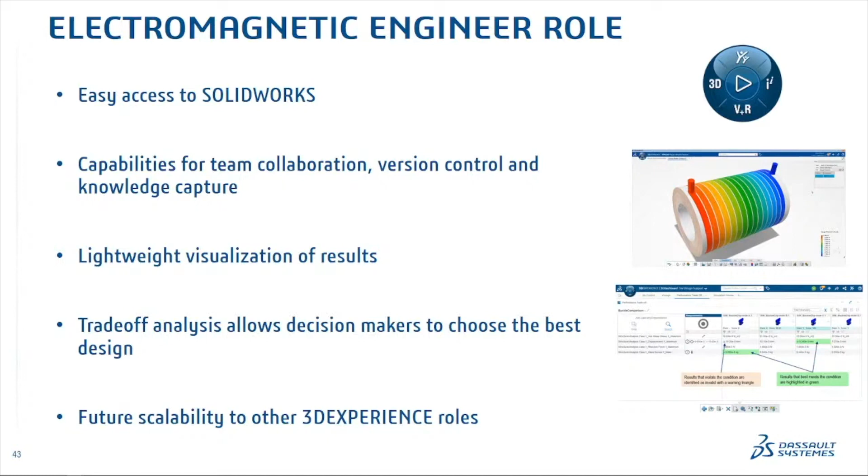Because it's on the platform, we can enable lightweight visualization of results. We run the analysis and view the results right in the 3D Experience interface, but you can also view them in your web browser—that's our lightweight results viewer. So if you're traveling and want to check simulation results, you don't have to open your computer and fire up the platform. Any device with a web browser, whether smartphone or iPad, lets you view your results. To me, that's a huge advantage.

We also have the ability to run trade-off analysis, true for the structural, CFD, and electromagnetics engineer roles as well, essentially allowing decision makers to choose the best design based on different data and parameters. With our structural and CFD solver, we also have a parametric solver, able to take all the different parametric conditions, whether simulation or design parameters, and vary the design to get the best results. And then, of course, there's future scalability to other 3D Experience roles. Our goal is having all these solutions on the platform working together to build that cohesive environment for team collaboration and data management.

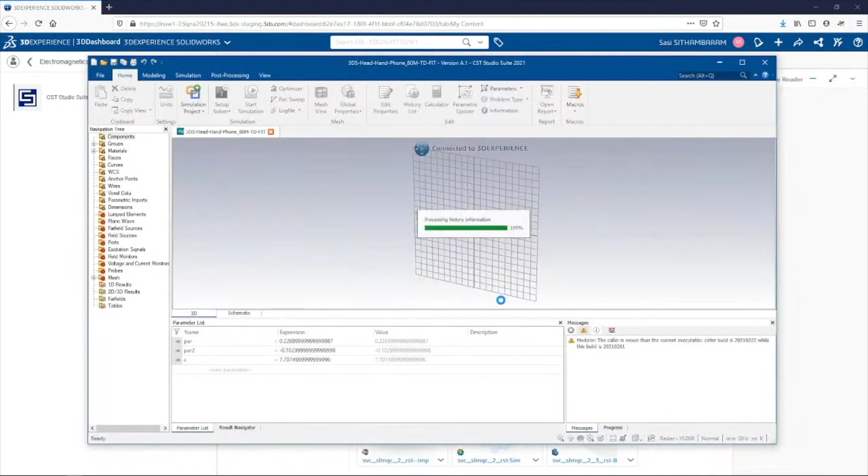So taking a look at what this looks like, within the 3D Experience platform we can launch CST Studio Suite. That's one difference with our electromagnetics solution—instead of running it in the 3D Experience interface, we run it directly in CST Studio Suite, which is known for a very clean, sleek interface. So today we'll still run our electromagnetic simulation in the CST Studio Suite UI. The advantage of having it linked to the platform is that all our data can be accessed right from the platform—the same data used for structural and thermal analysis can be used within CST Studio Suite to run electromagnetics simulation.

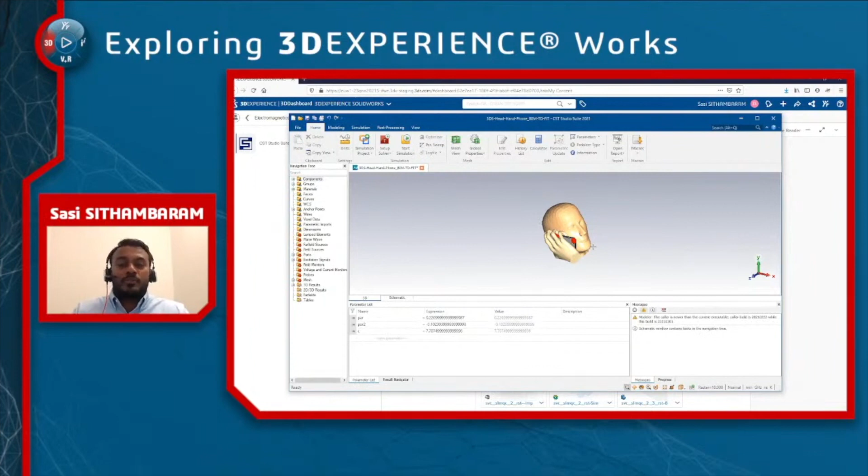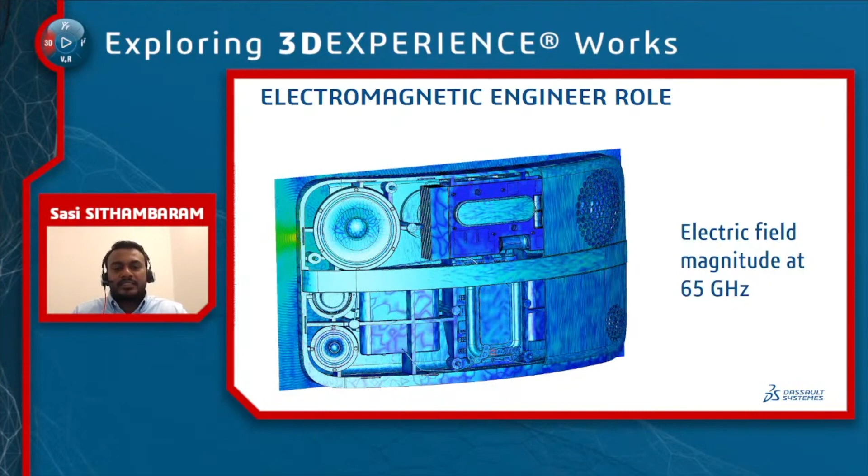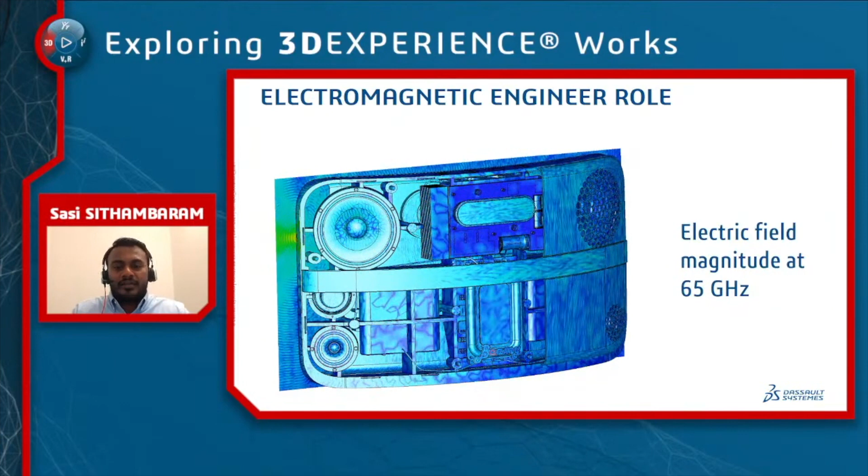When we think about running simulations, we can also run them for future concepts. The original Beamy had one antenna on one side, but what if there was interference on that side? A future concept is breaking that one antenna into four separate antennas to provide better coverage. Being able to run these what-if scenarios really enables you to innovate for future products—maybe next year you'd have two versions, one with one antenna and one with four, slightly more expensive. This leaves the door open for future ideas and lets you move fast on them without redoing any work you've already done.

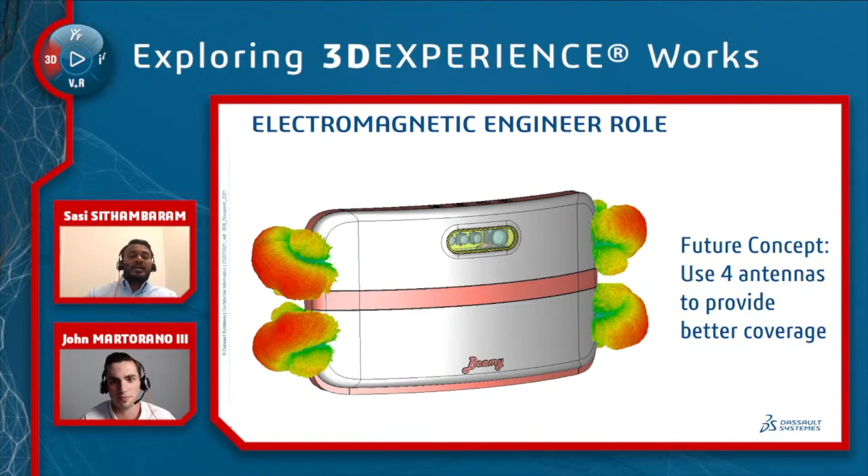Yeah, that's the whole idea, right? When we think about engineering, we want to continue to build on the innovation we've already integrated into our products. A Beamy projector like this is really ahead of its time, and being able to continue to innovate and test all these different scenarios with such a small release cycle, that's really where this platform is going to be a good fit for that engineering environment.

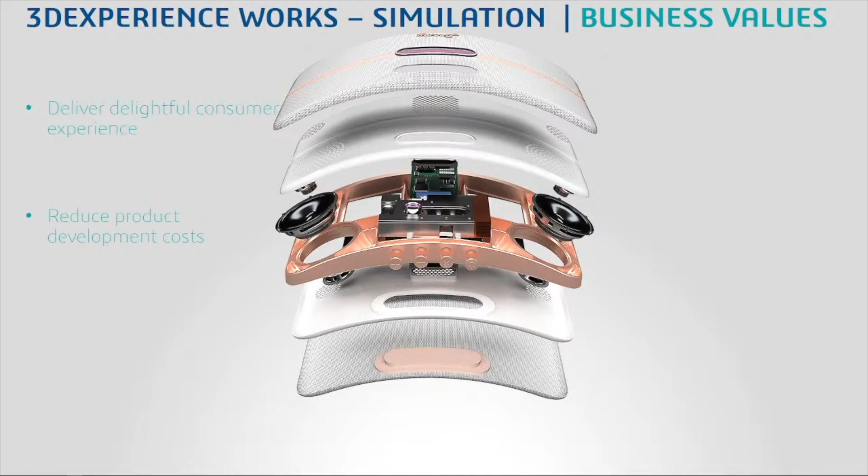Reduce product development costs. Physical prototyping is not going to go away, we need physical prototypes to ensure the parts we manufacture work. But our goal is to shorten that cycle, so we can get to the best design by the time we reach the physical prototyping stage. Imagine the amount of time and money we'll save by just shortening that cycle.

Innovate a broader portfolio - that's super important, being able to give our consumers options to fit their needs, just like us with the 3D Experience platform, where we provide users with many different options and a broader portfolio to meet your engineering needs. Minimize rework and compliance costs, and of course, streamline communication between all the stakeholders.

Today we focused on simulation, but the platform enables marketing teams, sales teams, strategy teams, operational teams, and manufacturing teams to all work together. When we're putting out a product like this, all of these teams are equally important, and having a platform where we can work together to put out the best product is super important.

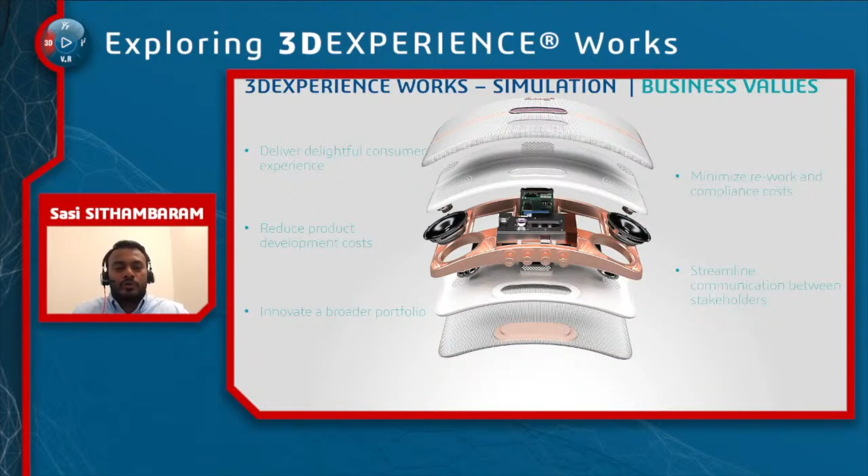That's it. I wanted to thank everybody for joining me. Absolutely, thank you so much today for joining us.

Whether you're doing CFD, structural analysis, or electromagnetics, the 3D Experience platform, what I took away from that is it allows everybody to work together on the same data at the same time. So it's really nice, that was definitely a refreshing presentation.

And again, thank you so much, Sasi, for joining us. We always enjoy having you or any of your team members, honestly, on our show. We had a lot of fun last time too. So, thank you everybody for joining us.